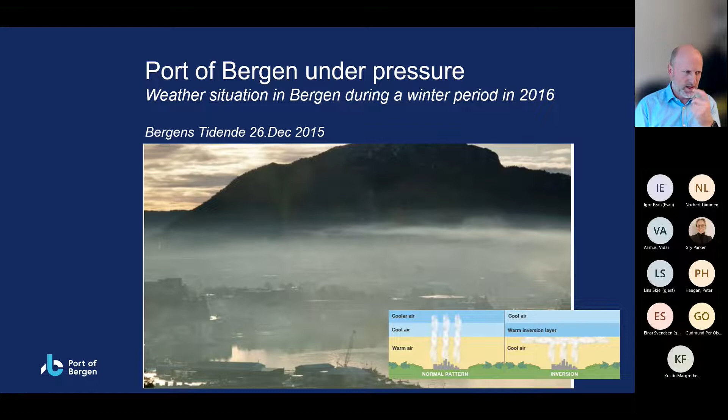For the port, we got a lot of noise in the media due to this, because we had ships in our ports, and people wanted us to move these kinds of ships out of the city center. This was in the first week of January 2016, and during that week we were in the media 45 times, in newspapers, local television, and national television.

Then we saw that we needed more facts about the ships in the city. We had to find out our impact on emissions in the city. This offshore activity is very important for Bergen and for many suppliers there, and for marine activity in general. We know all the activity in the North Sea, and the ships staying in Bergen are here just waiting for operations in the North Sea.

There are a lot of privately-owned terminals surrounding Bergen, but they have so much activity with unloading, loading, and services that they won't allow ships to stay and just wait for operations in the North Sea. So the only option for these ships is to stay in our port on the berth, as we can see in the picture, or to wait out on the fjord. So Bergen is a very important place for these offshore companies.

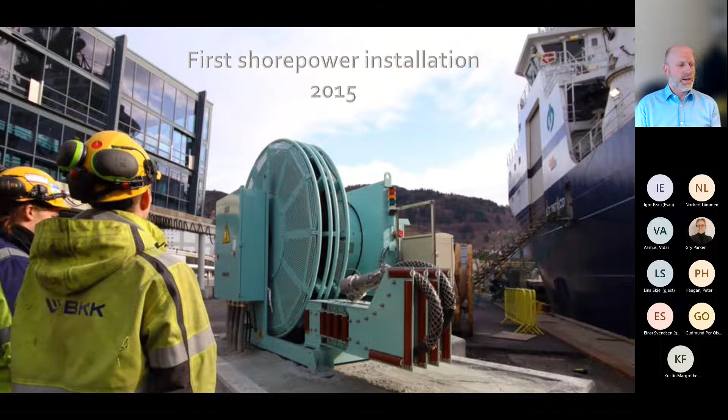After a while, Equinor decided to make all contracts based on shore power for the ships. So the offshore ships were not allowed to get contracts with Equinor if they couldn't connect to shore power when at port. That was an important milestone for us, because then we got more customers and requests to build even more shore power systems.

When we had the research in 2015, 2016, on wintertime, it said the emission will slowly go out on the seaside due to a warmer sea than on the shore side. In the summertime we had the opposite situation, because then it's colder on the seaside and warmer on the shore side, so we get the opposite emission pattern.

So the emission, or the smoke coming out from these cruise ships, is slowly moving into the city center. So even if the city didn't have a dangerous or red situation with regards to total emission, it was obvious that our impact on the city in summertime with the cruise ships was rather high.

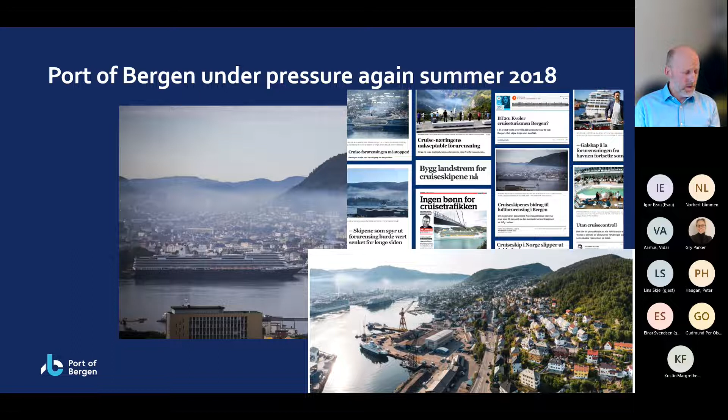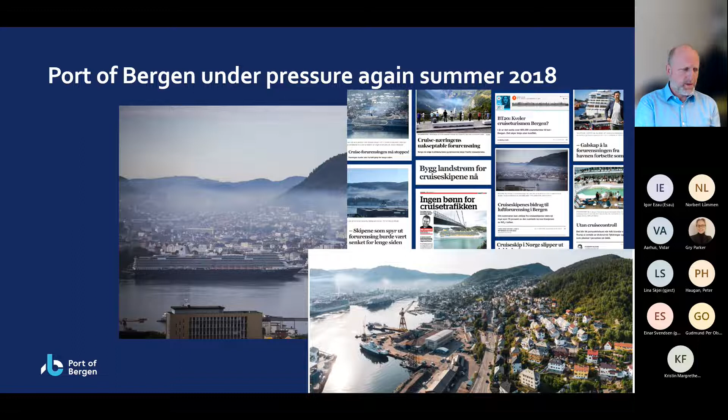Then we got a new storm in the media saying the cruise ships have to leave the city of Bergen, have to pay to build up shore power connections, and all these kinds of things. This ended up in a decision in the city council where we got a limitation on the number of ships staying at port in Bergen.

Until 2018, we could take in maybe up to 5-6 cruise ships per day, with up to 12,000-13,000 passengers coming into the city center. That was a challenge for the city, of course. I would say we had stretched that line too much, so we got that reduction from the municipality, and we also got a lot of reaction from the inhabitants in Bergen.

There is a law saying that the municipality actually cannot impose such a limitation. So the municipality said that we have to search for solutions with the cruise industry.

So we went out to all the cruise industry and informed them that from now on there will be a reduction in number of ships, and we wanted to find a solution for how we could spread the cruise traffic more over the weeks, days, and also months during the year. So we are using the shoulder seasons more, but it is of course a challenge because the guests for the cruise ships are there in the summertime, and that's a common challenge for all of us.

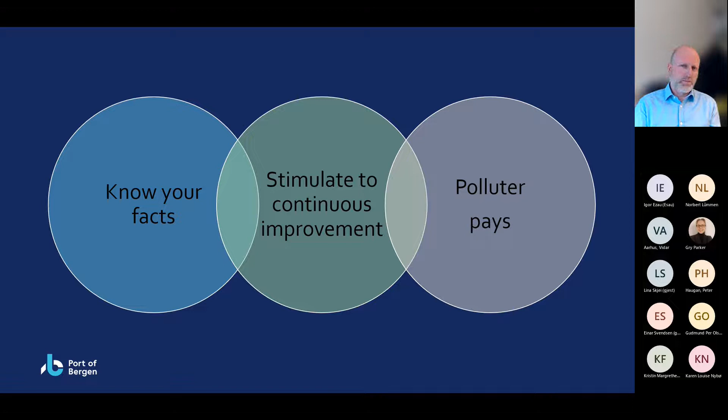During that process, we started already in 2016 with an index that we wanted to build up. Internationally, there is an index called the Environmental Ship Index. That index shows how much emission you are sending out when you are moving to and from the ports, when you are sailing in international waters. But there was no index which took into account the emissions actually at port, and that was what we wanted to build up.

So we took contact with DNV-GL, as it was called then, and we also connected with some other ports in Norway, and we built up something called the Environmental Port Index.

To explain simply what the Environmental Port Index is: all cruise ships coming into Bergen or other ports in Norway have to be registered in a register with DNV-GL or DNV, where they put in their engines. What kind of engines do they have on their ships? There's a lot of different technology in these engines, and there are also different rules depending on when the ships were built.

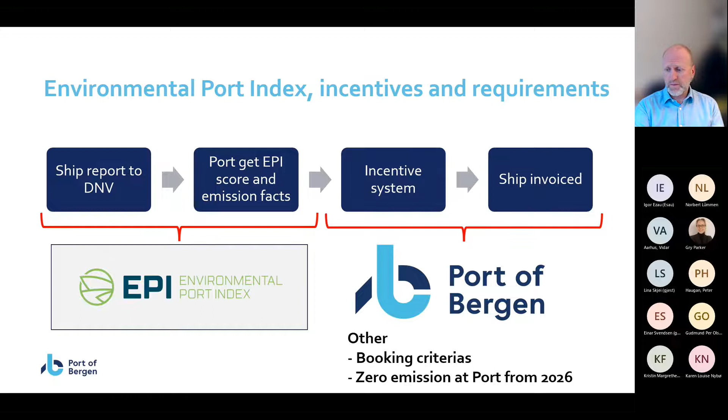So that was very short about the EPI, and the EPI has been received by the industry in a very good way, I would say.

There is a typical comment here saying that TUI, for example, is saying that environmental steps are not only about shore power. It's a lot of small steps on board of these ships, which make them reduce the number of emissions when they are staying at port and when they are sailing. And suddenly they get a rebate from us as a port because they have taken these steps.

TUI, for example, that was one of the ships that you saw from the pictures, sending out a lot of smoke. They have scrubbers. They have done a lot of technology improvements on board. So they have actually a score of around 70, even without using shore power or other things. So they get a good rebate in Port of Bergen when they stay at port.

The challenge for us is actually that the scrubber gives them a better result on the EPI than if they turn off the scrubber. If they turn off the scrubber, the emission is actually bigger, but we don't have the visual smoke that we see in the city. And that is a challenge for us and for the cruise companies.

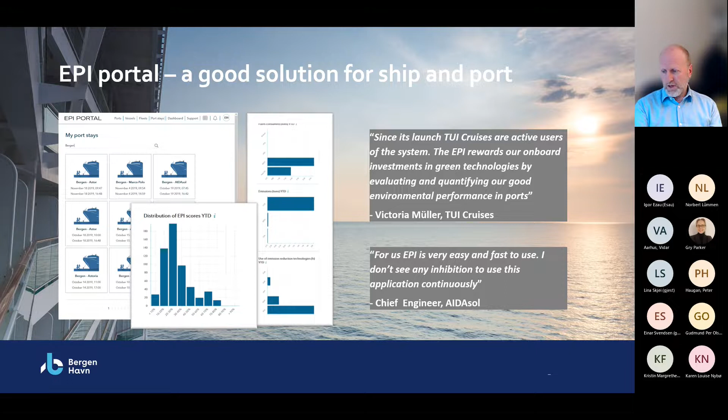We also discovered that shore power is not only about emission, it's also about noise. An offshore ship staying in Bergen has some kind of noise, making the houses vibrate. I don't know what it is in English, but it is a very low tone, which can be a challenge for the inhabitants living close to the city. When we connected the ship to shore power, they stopped the engine and that disappeared totally. So that was very good.

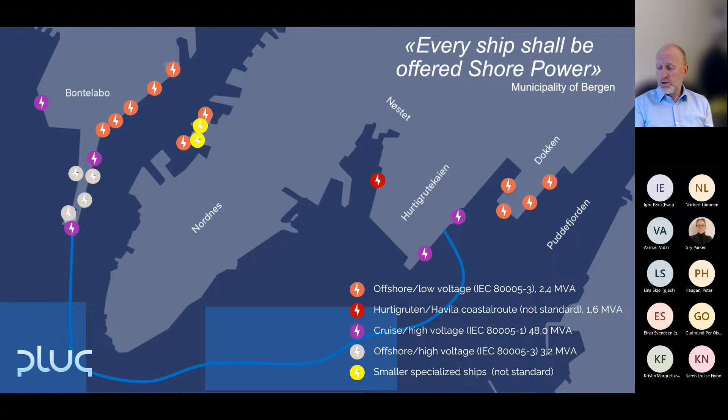I must say that Port of Bergen has been a front runner when it comes to these green developments. It was Port of Bergen who started with this EPI system. Now there are more than 20 ports connected to that environmental port index. We have also been a front runner when it comes to shore power. There's no port in Bergen, now in Norway, who have more connections than we have, and this new system with cruise is actually the biggest cruise park in Europe.

We admit that we are lucky when it comes to shore power because we have green electricity very close to the port. We have high voltage very close to the port, and that's not the situation for all cities around in Europe and other places. But in Norway, they are building shore power now in Ålesund, in Haugesund, in Kristiansand. That system was the first system that was built. So during the next 2 years, I would say we will be 5 or 6 cruise ports in Norway that have shore power.

So what about the future? We are challenged there again. We are part of an EU research project together with Viking Cruises, where they are testing out hydrogen for cruise ships. The cruise ships want, of course, to sail into Geiranger Fjord and other fjords, where they will not be allowed to sail without zero emissions from 2026. So this is part of that project.

And what they want to look into is if you can swap a hydrogen container into the ships. So it's not bunkering hydrogen, but it's swapping a container into the ship. The same situation we have for a company called Samskip, which is sailing in the Oslofjord area, but they are also sailing here to our port. They are now building a new ship called Sea Shuttle, where they also will have a hydrogen solution, and they will also have a swap solution with hydrogen. They have a plan to build that kind of ship also for sailing in the western part of Norway. So we have to prepare for these kinds of ships coming to our area.

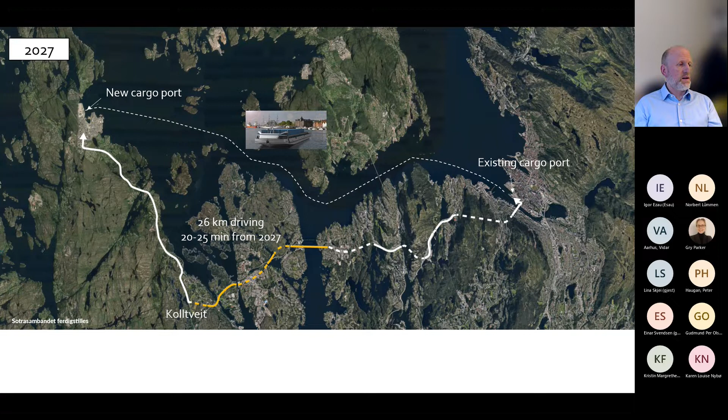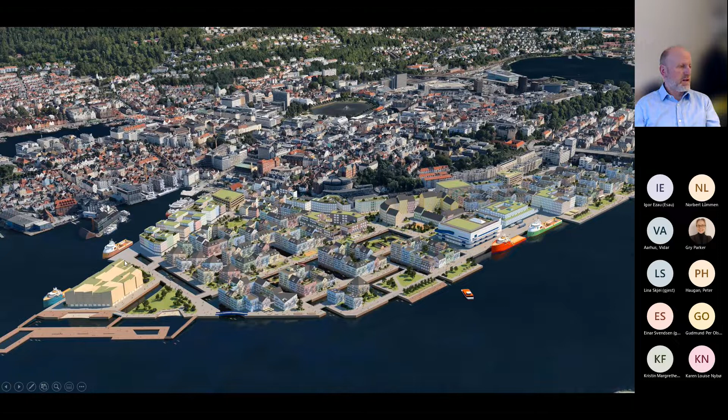the waterways. And this is something that we are discussing with the municipality - how can we still use the waterways into the city, even if they are doing their development? And if we are going back to this picture, we have agreed with them that these ships in the future will go into this side here, on the left side, in the Jekteviken area, such as we can get this cargo quickly into the city center and distribute it to the customers.

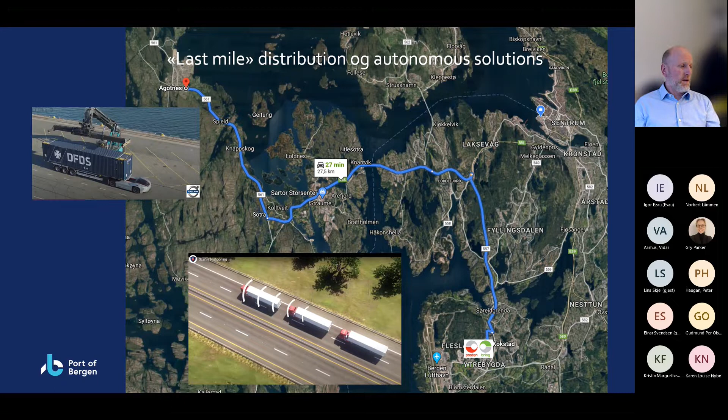But we also see a development for the trucks going by road. There will come also autonomous trucks, electrical trucks. There will be platooning driving, like you see here, where you have a manual driver in the front, but no drivers in the second and third trailer, so they are just following the first trailer. So we can actually have road trains more or less from Ågotnes when the roads are good enough for that. So there will also be a development for that.

But when we are moving our cargo facilities out to Ågotnes, we also see that we have a possibility to build up a hub. We can be a big hub, not only for the western part of Norway, but also for the local terminals close to Bergen. That is a position we cannot take today because we are in the middle of the city center, but we can take it when we are moving out to Ågotnes.

And we know that for the future, we think that distribution of energy is something which will be very important - for example, distribution of hydrogen in containers, ammonia, methanol, whatever in containers, and batteries as well. As you can see in this picture, there's a lot of smaller and bigger terminals very close to Ågotnes. So we want the feeder traffic to go into Ågotnes and distribute the cargo to, for example, Mongstad. Traffic to Mongstad today from Ågotnes has to go by truck via Bergen, and we don't want that traffic through the city.

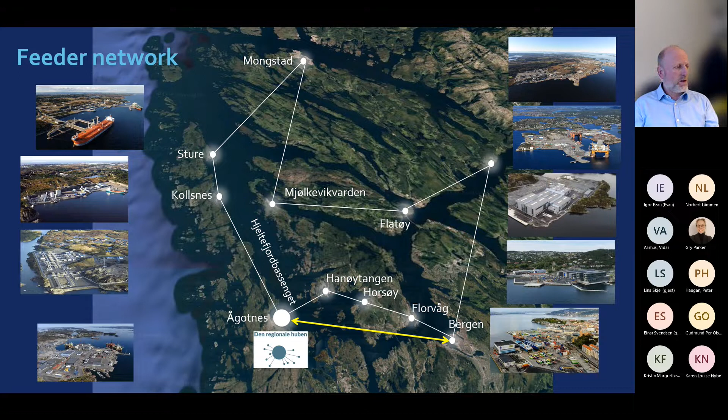It's the same situation in the south. We have some big terminals also in that area, and we also want to build up a feeder there.

We also see new routes coming up, modern zero emission routes. Here is something called Topeka. They are planning to build two ships like this, where they are going from Stavanger area up to Bergen area two times per day. And that's an important step for us to build up a network of vessels along the coast, so we can also put in distribution vessels in our region.